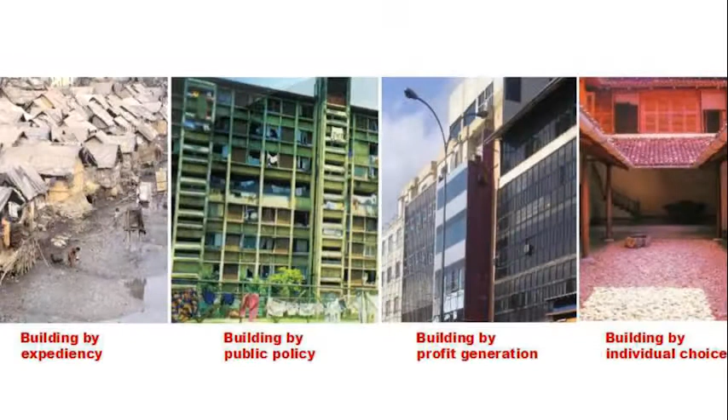There's also a kind of misallocation of intellectual effort in the industry. Professional and industrial actors have largely ignored the spatial needs of the poor and allowed proliferation of informal settlements as a social pressure-releasing mechanism. Public housing, traditionally seen as government's responsibility, has not risen up to the challenge. Market-based commercial development, on the other hand, is highly supported by government through tax cuts, zoning, and so on. Architectural production, unfortunately, is limited to a few individual buildings, often defined by patronage and top-end tourism.

So what has happened is that the construction industry is fragmented into different pockets of production with little or no reciprocal connection between labor training and knowledge dissemination. This has made it difficult for all those informal actors starting from the bottom of the ladder to move across markets, learn from others, and develop socially as well as technologically. In other words, there are seemingly technological barriers which prevent dissemination of knowledge across markets.

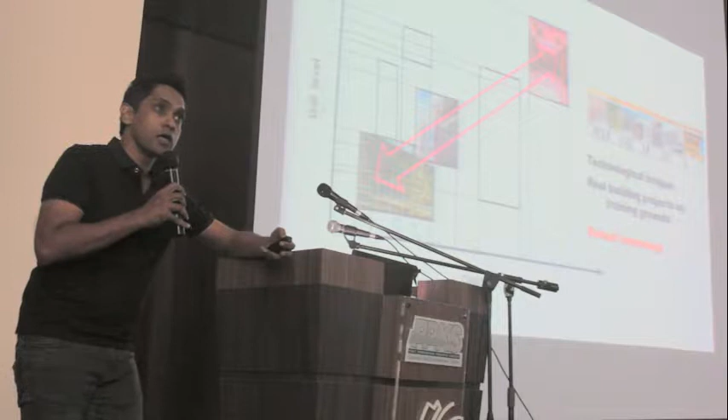So if there are technological barriers which prevent knowledge dissemination, then we will have to have technological bridges in the form of skill-building opportunities. Our work in Sri Lanka looks at whether real building projects can be used as opportunities to train workers. From an architectural and design point of view, the argument is that if you use real building projects to train workers, then the building systems we use should have plenty of tolerances and latitude for errors, and they should be inherently robust as opposed to being precise and sensitive.

So what I'm going to do is go through a few of the projects we have done in Sri Lanka, which in different ways try to look at this issue in their own capacity. The first project I'm going to present is a community library building that we built in a small town called Ambepussa, about 70 kilometers from Colombo, the capital city. It was built by a local regiment of army soldiers for the use of the soldiers as well as for the community, especially school children living in the nearby area.

One of the first things that we saw when we visited the site was that the army had been building a playground nearby, so there were plenty of residual earth, and the army has the human resource. So using rammed earth as the main building material became a serious option.

The complex has three main buildings. The first one is the lending and reference section. One in the middle, which runs up the hill, is a children's section, and one on the top is a research area. Part of the building sits on the earth using rammed earth walls, and the other part floats above rocks using a recycled steel structural frame. And for the floor deck, we have used discarded railway sleepers.

We want to be very sensitive in the way that we tackle the environment and the placing of the building. We didn't cut any trees on the site, so the building sort of meanders among the trees, and the idea is to create a series of indoor and outdoor spaces to accommodate the functions of the program.

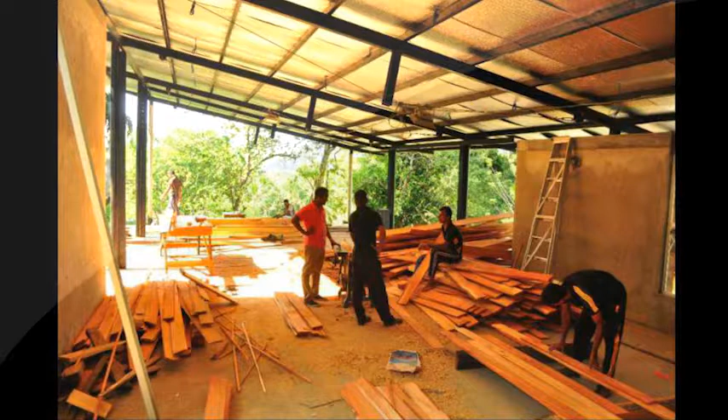But as I said, one of the critical factors was the use of labor. It was built by soldiers, and there were a few reasons why we use soldiers. One is that we didn't have a lot of money to spend on the project, so we didn't have resources to spend on skilled labor. Second is that after the war, we were left with this large workforce of soldiers who almost didn't have anything to do. So it became logical to retrain them in other trades and then use them in post-war reconstruction work.

Third thing is that, especially during the last phases of the war, the government recruited a lot of young people to the army, and they didn't even have completed their formal education. The thing with the army is that when soldiers reach a certain age, say 35, they're encouraged to leave, because the army always wants to recycle - they want to be young. So these kids who join the army without any formal education, when they were asked to retire, don't have any fallback situation. Some of them become security guards, some even fall into the underworld.

So the idea is that we use the building process to transfer trade skills so that when they retire, they can use those skills to build careers elsewhere.

But again, the thing is that we didn't have money to train the soldiers first and build the building, so the training had to be done parallel to the building process, and that had to be planned. So these are some of the studies that we did to organize the training intervention.

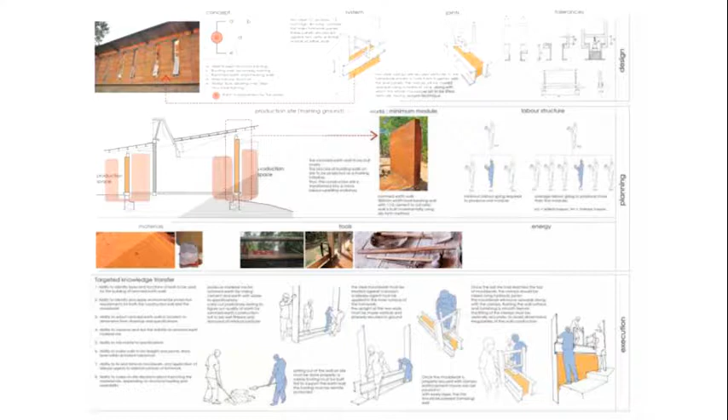So this is a building of rammed earth wall. We had to design the building system as well as the construction system, the joints and tolerances. We had to define the training ground, the production site, minimum working module required to have the training interventions, the labor structure for workshops as well as eventually to build the building, and the execution process, which eventually became the training steps. We call this diagram the labor training matrix.

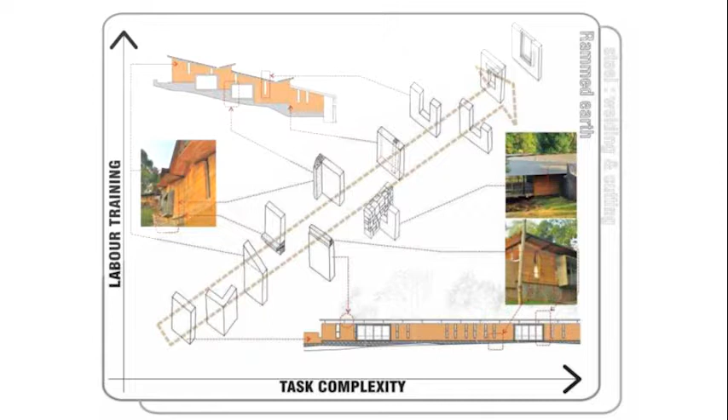So this is different building systems of rammed earth wall organized according to task complexity. You have the most simple version of a rammed earth wall, which is your typical geometrical wall. Then we are trying to connect two walls together perpendicularly. We are trying to taper the wall here so that we are experimenting with the shape of the wall. We are trying to connect rammed earth with other building systems, experimenting with threshold conditions. We are trying to penetrate the wall to create openings. So the complexity of the system increases.

The idea is that an unskilled worker can start building the most simple version and then move up the technical ladder, acquiring skills. We have strategically incorporated these building systems in the building itself so that the construction process eventually becomes a kind of skill-building ladder.

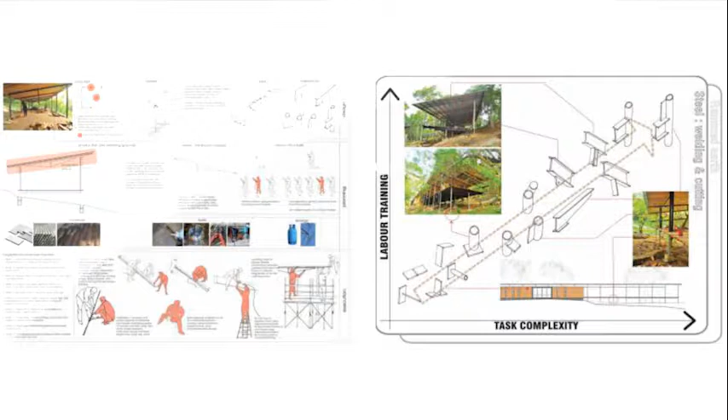And we did this with other building systems as well. So this is building a steel truss - it's about the design of the system, the planning of workshops, and the execution process. The skill building ladder again: you have a very simple version of a welding joint where we are trying to weld a rebar to a steel plate. Here you have a complex welding joint where we are trying to weld an I-section beam to a steel tube.

An unskilled worker can start building the simple version and then move up the skill building ladder, acquiring the skill itself. Eventually, the construction process became a large skill building workshop.

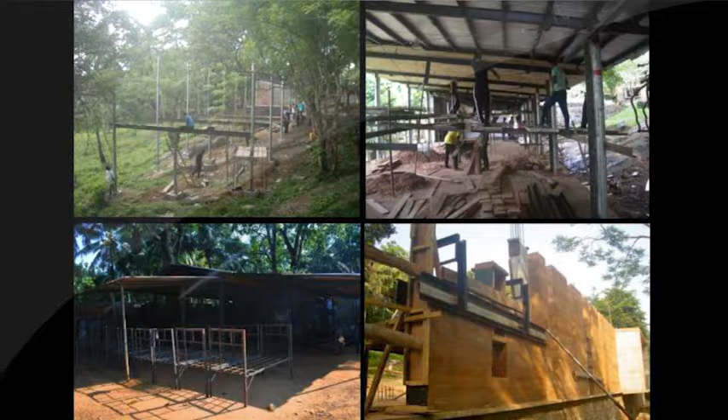We also tried to tap into the existing resources that were there. This is a kind of welding plant that the soldiers already had—they were building bed frames in steel using steel angle sections, so they had welding skill at a very basic level. The idea was to tap into that resource and develop them to a point where they could eventually build the building.

But the critical argument is that if you use real building projects to train workers, the building system should be designed with plenty of tolerances. If you look at the texture of this wall, for example, you can see different configurations. For us, it doesn't really matter.

We like to think that the ethos of the building does not rely on precision in the making, but rather it's about the scale, the texture, the way the building sits in the landscape, and so on. Even in designing building systems—like here, you have a roof truss, then a ceiling line, and a roof line—they are not aligned with each other. They overlap, because aligning is difficult when you use unskilled workers.

If they made a dimensional error in cutting the truss, that would be visible if we tried to align them. But at the same time, we like the fact that when the building moves away from its body, it starts to peel into layers. So most of these details are partly pragmatic, but partly poetic.

At the same time, we didn't want to compromise the performance of the building. When it comes to this kind of intervention, performance is all about common sense. It's common sense to design buildings with narrow floor plates in the tropics so you have plenty of cross ventilation. It's common sense to design buildings around courtyards and trees so the trees can shade the building. It's common sense to use thermal mass so the interior can be kept cooler.

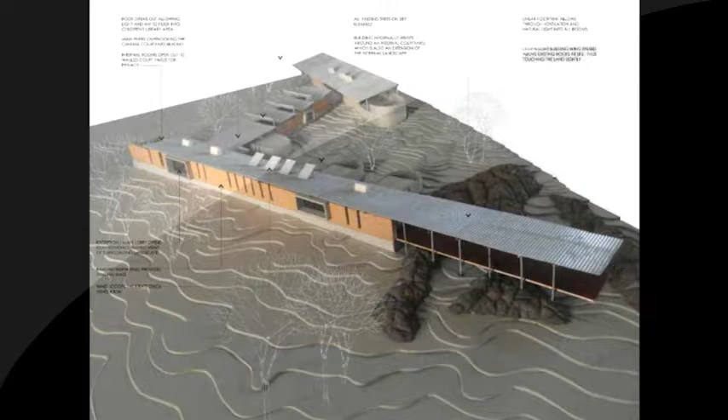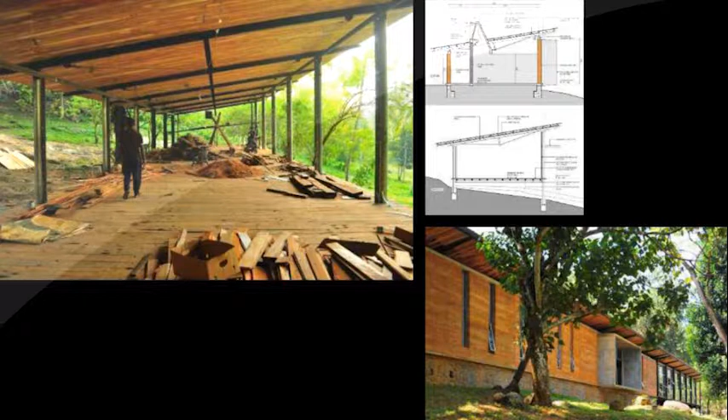It's common sense to bring in light wells and wind scoops and so on. It's common sense to raise the building so you don't interrupt natural water paths. Even in designing the building system, we were thinking of training interventions—the entire building is designed as a replication of a portal frame structure, so that once you train the soldiers to build the portal frame, they can replicate the building.

But at the same time, architecture is about color, about light, about texture, about shadows, about how the building sits in the landscape, about indoor and outdoor spaces. It's about framing of the landscape, about understanding space as a journey, about the scale, about the proportions, about the textures, about how you frame outside from inside.

But it's also about people—the people who build the building as well as the people who use it. So the idea is to create a social capital, which is the trained workforce, and a physical capital, which is the kit-of-parts building system, and use this social capital and physical capital to replicate similar libraries elsewhere.

So that's the first building. The second one is a totally different context, procured in a totally different way. It's a house that we built in one of the residential suburbs in Colombo. This is the house, and you can see it's a typical suburban landscape with different textures.

We built this for one of our friends whose father was the builder, but not a formal builder—he was in the government sector for 20 years, resigned, and then set up his construction business. The first thing he told us was that he didn't have very good carpenters or welders, but he has good masons. So using brick as the main material became a serious possibility, and we wanted to use exposed brickwork.

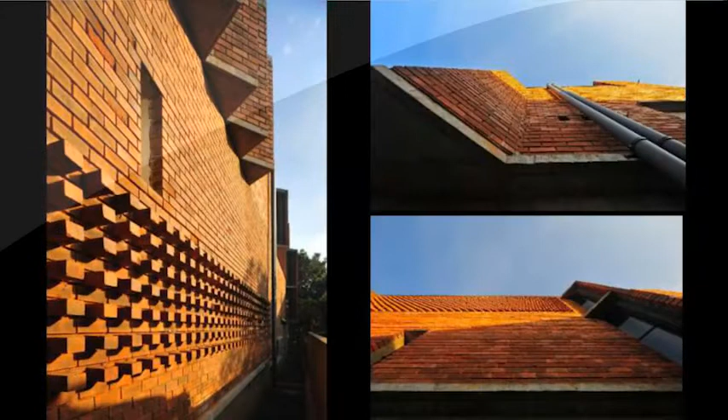But a specific character of the building is still the wall, and we have introduced a series of bricklaying techniques in the facade. Partly it's aesthetics, but there was also another reason.

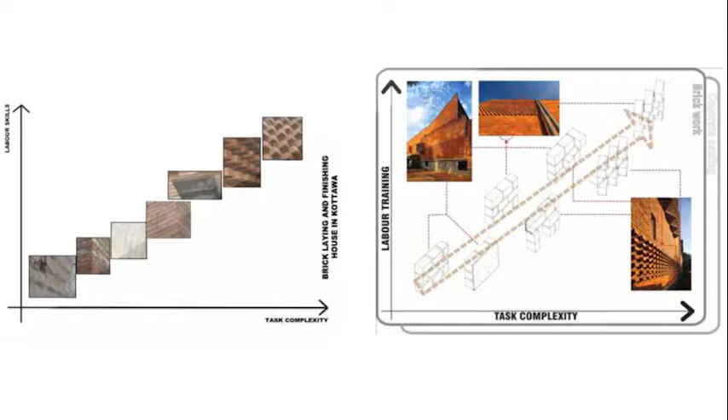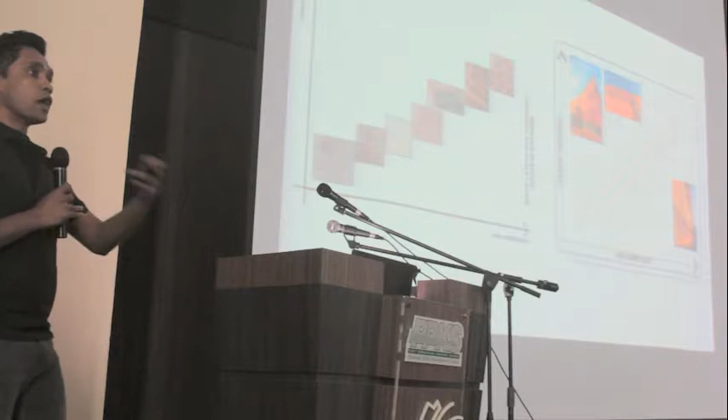We were told these masons had been in the industry for 20 years, and that was true, but this is what they had been doing—building brick walls and then plastering them. So once you ask them to do exposed brickwork, it's a totally different set of skills. We wanted to use the building of the facade as an opportunity to transfer skills to them and build up their labor capacity.

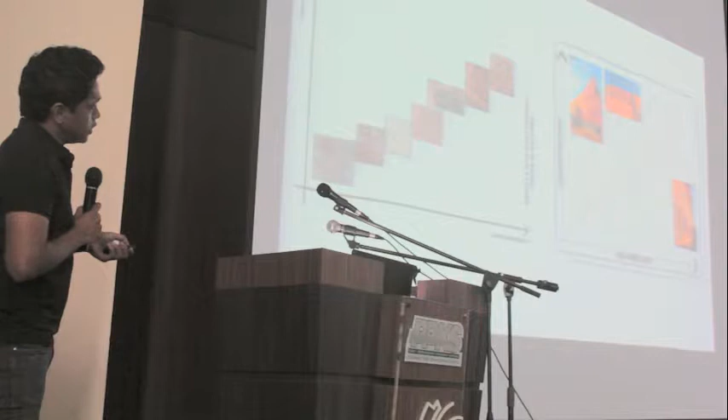So what we did was ask them to first build the walls that you would plaster, then gradually took them through the building of the facade, creating opportunities for them to upskill their techniques. This is one of the early walls they built. We asked them to first build the walls at the back and then come towards the front.

You can see here they've been struggling to align the mortar joints. There are many reasons—they weren't used to building such walls, but also in Sri Lanka, when you order a 200 millimeter brick, it never comes in exactly 200 millimeters—it could be 201, 199, or 195. When you build a brick wall from one end to another, it becomes difficult to manage the mortar joint, so they eventually learned that the tolerance needs to be in the joint, not in the brick.

But even though you see this in the image, if you go there physically you wouldn't necessarily notice these things, because there are so many other things happening in the facade, so the labor errors are camouflaged. We like to think there's a kind of built-in robustness in the facade so the labor errors are camouflaged. At the end of the day, the final product is a byproduct of responding to this series of spatial, cultural, technical, and social conditions.

Third project is a department store that we built on one of those commercial streets in Colombo. So that is the building. When I say department store, this is not a high-end department store—it's on the bottom end, catering to low and middle income groups of society. But you can see that most buildings in the neighborhood are fairly badly built and badly serviced, mostly glass box buildings which don't really work in the tropics.

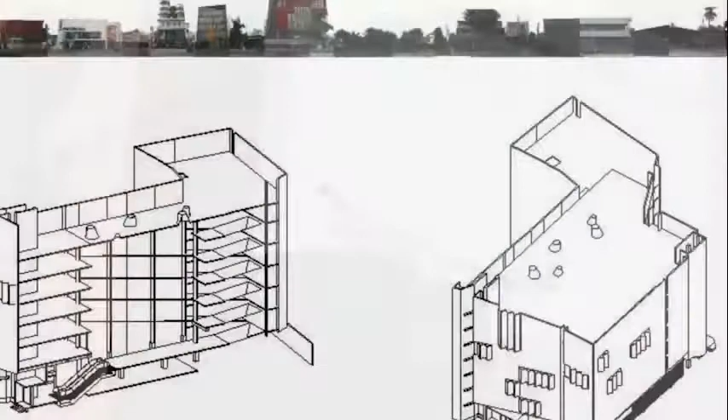So we wanted to respond to the informal, chaotic character of the streetscape, but also improve the typology. We wanted to extend the street into the building and design the building itself as a street. We created this large atrium space and introduced ramps to connect the different floor levels, so the street, physically as well as metaphorically, runs through the building.

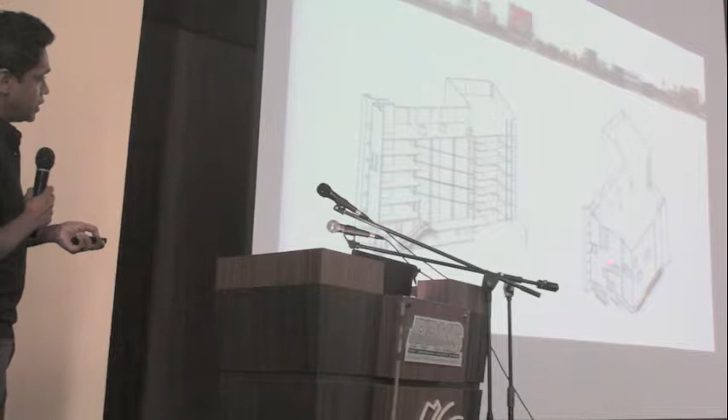We project the top part of the building from the street level so that the glazing at street level is protected. We reduced most of the glass in the facade and introduced these windows, tilting them to cut off the western sun while bringing light from the top.

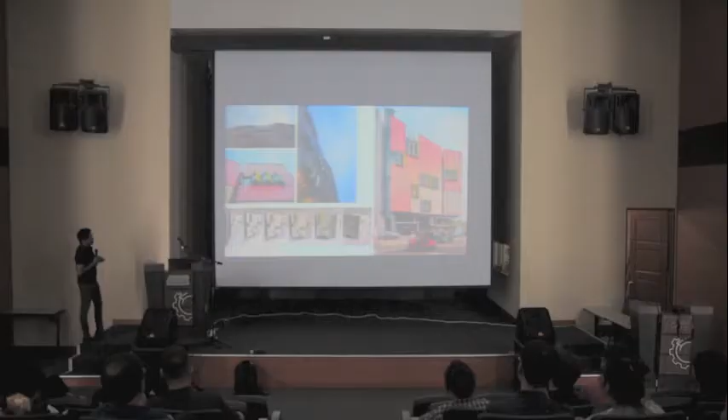The tilting of the windows also created a nice urban experience along the streetscape, because as you move from one part of the building to the other side, the facade reveals a different facet. But at the same time, there was again an impact on labor.

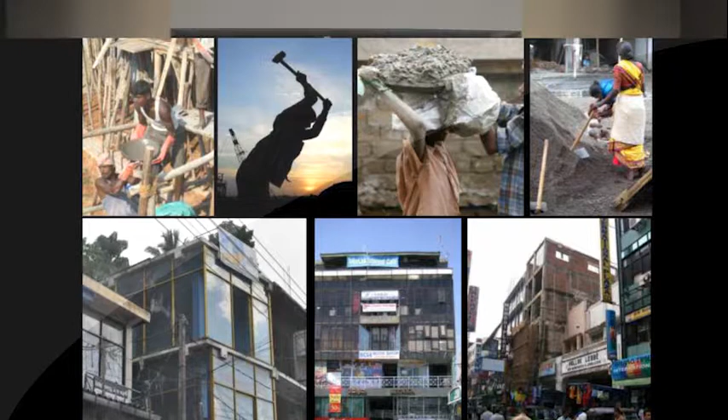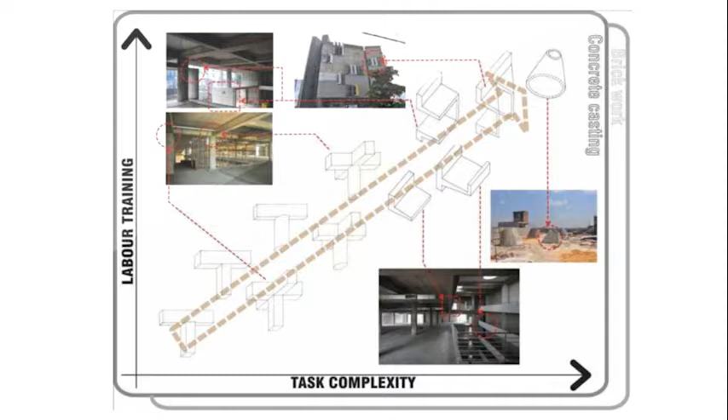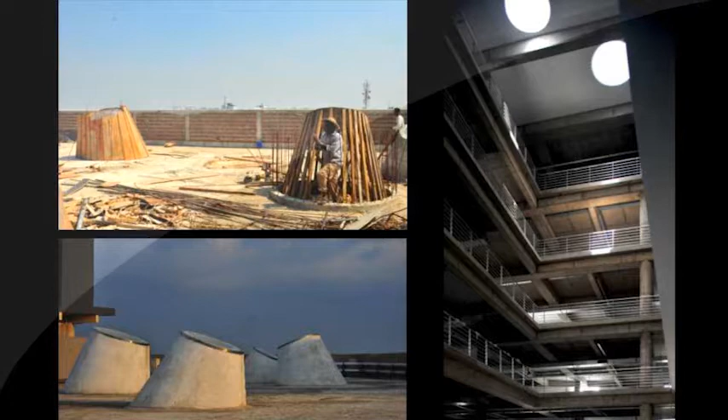So what happened was the owners of a department store chain had been relying on informal work gangs to build their other department stores, and they had an economic advantage using that workforce. They were adamant that we should seek the economic benefit of that. So we said that's fine, we'll use the economy, but at the same time, if we trigger a series of training interventions, we'll have the benefit of economy but also a better product. That triggered a series of training interventions, in this instance on concrete casting. So the fabrication of the system, its formal composition, and the eventual spatial condition of the building were all tied to subsequent training aspirations of the project.

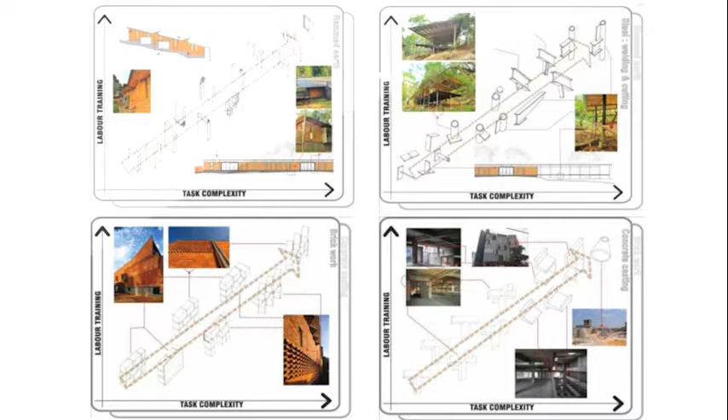This is what we've been doing, from rammed earth to steel to brick to concrete. We've been initiating different training interventions, not only to improve labor skills but also to give us an opportunity to build better products. There have been other connotations of labor in our work. I'll quickly go through some other examples.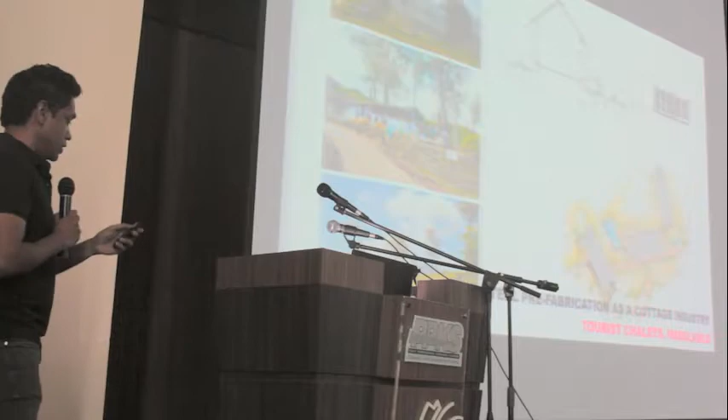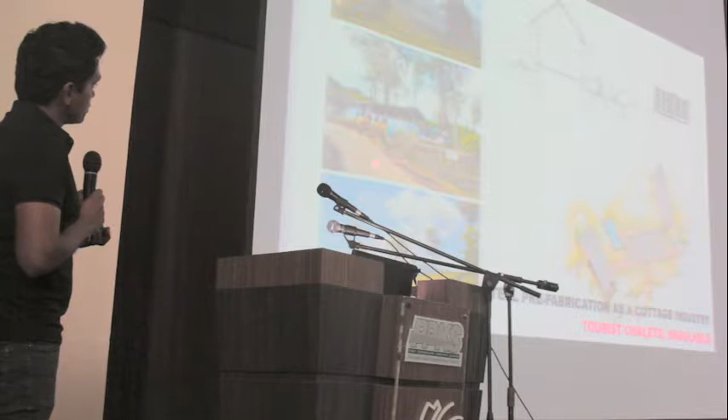This is a small chalet we were asked to build in one of the beautiful parts of the country, up in the hills. There were two issues. One is that the access road was very narrow, just a one-way road leading to the hotel, and from there you have to walk through narrow footpaths to access our site. So we had to respond to the limitations in access. Second, we wanted to design the building so that once tourism activities are terminated, we can dismantle it so the plantation can grow back.

So we wanted to design a sort of prefabricated modular building, but the problem is that in Sri Lanka we don't have an industry of prefabrication, especially in those rural parts of the country. So what we did was get a local welder, and we designed the building so that 80% of components could be built in his backyard, transported to the site, and then assembled on site. This is a deviation from standard practice, because welders in Sri Lanka are what we call journeyman welders.

They are site specific, and when they move from site to site, they take their plants and labor with them. Because of that, they can't do multiple work at once. So the idea is that if they can fabricate at least 80% of components in their backyard, then they can take on multiple jobs.

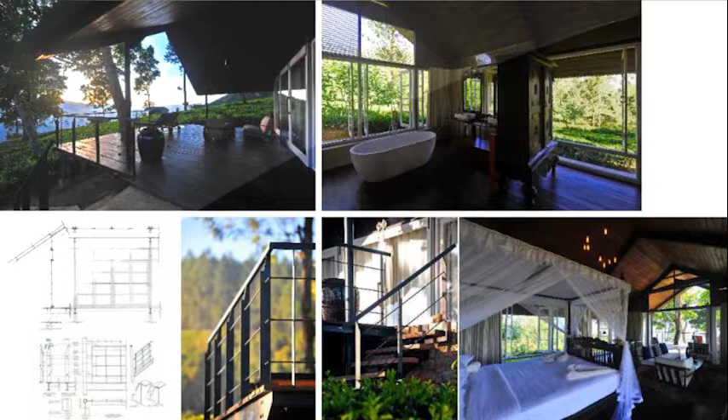Eventually they built this structure in two weeks, and the rest of the building in another six weeks. Everything is modular construction, even the windows, so you can take them apart. Other than a few retaining walls, the entire structure can be disassembled. There's a scenographic effect in the building responding to the program, since it's a touristic thing, but there's also complexity in the detail, because complexity allows us to upskill the workers. At the end of the day, it's about responding to a particular program and the demands of a particular landscape, but also seeing whether we can use that as an opportunity to reorganize the industry in a certain part of the country.

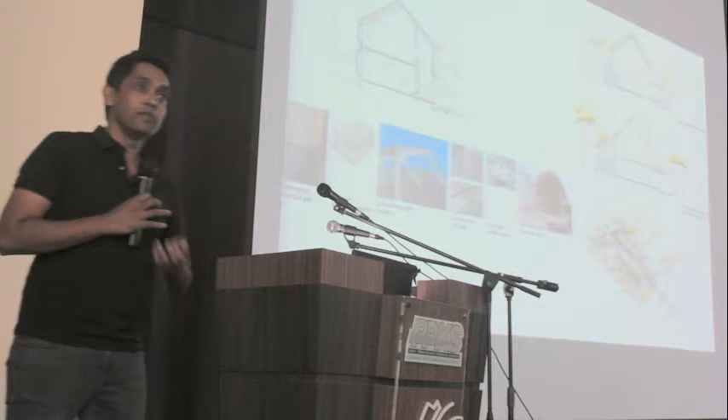This one also has an interesting story in terms of labor. It's a series of locker rooms we were asked to design for a cement factory in northern Sri Lanka. Again, it has a very brutal landscape—it's a cement factory, so it's concrete and steel. But being a cement factory, they had one material readily available: cement. So we thought of designing the building as a kit-of-parts system of cement components.

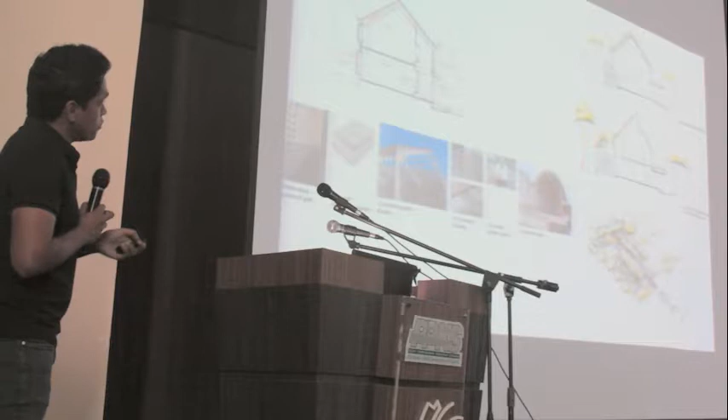So: perforated grills, sandwich panels, portal frames, walls and so on. But we also wanted to bring a certain environmental response to the building—natural ventilation, breathing walls, greening of the facade and so on. In terms of labor, the cement factory is owned by a European owner who has very strict labor standards for their workers. So we said, look, similar labor standards should be brought to construction workers as well.

Typically, 90% of construction sites in Sri Lanka don't meet such standards. So we insisted: why don't we introduce better safety standards? They agreed with that, everything was fine, but there was a problem.

The problem was that when the local contractors budgeted with the labor standards, the budget pumped up to 30% more. So it was not only the helmets, the harness, the boots, but what the contractor said was that the workers are not used to having these safety standards, they take more time to finish the building.

So we had three options. One is to go back to the client and ask for more money, which we did, and they just said, piss off, we are not going to give you any more money. Second one is to tell them, look, forget about the labor standards, we'll just do our architecture. And third one was for us to compromise, and compromise is what we did.

So we got rid of a couple of portal frame structures. We cladded the building with this very cheap steel material, which was found from the site itself. And then we did this graffiti to celebrate workers.

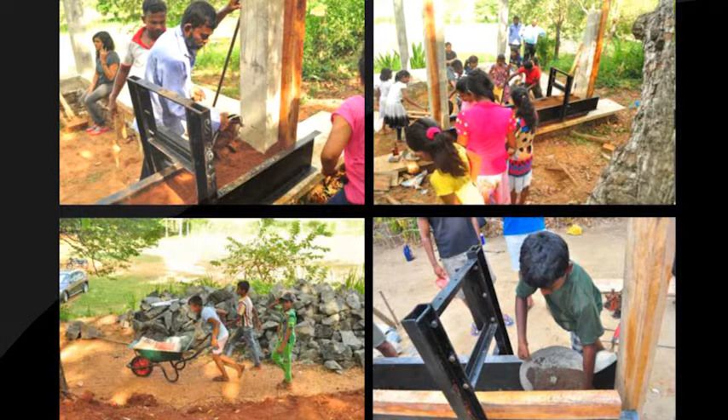So it's a collaborative process. It's a very slow process. Again, we are using rammed earth because it's economical, and kids love to work with earth. So at the end of the day, the building is as much about the process as it is about the product, and it's about creating that opportunity so that everyone can get involved. So it's we are using rammed earth and then ferrocement roof structure, and so on.

So very low cost, low skill construction system. So that would give opportunity for us to get everyone involved. So this is what we have been doing in Sri Lanka in a nutshell. This is not about continuing a style or a form, but this is about trying to understand specific context of specific projects and then try to come up with specific solutions. So every project is procured in a different way. So it's about being adaptable from the point of view of architectural approach.

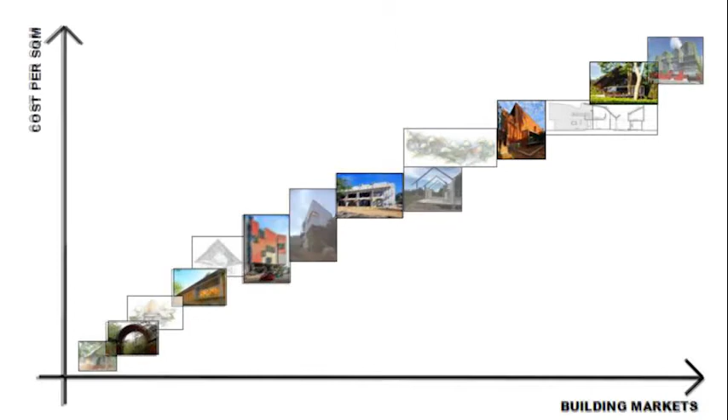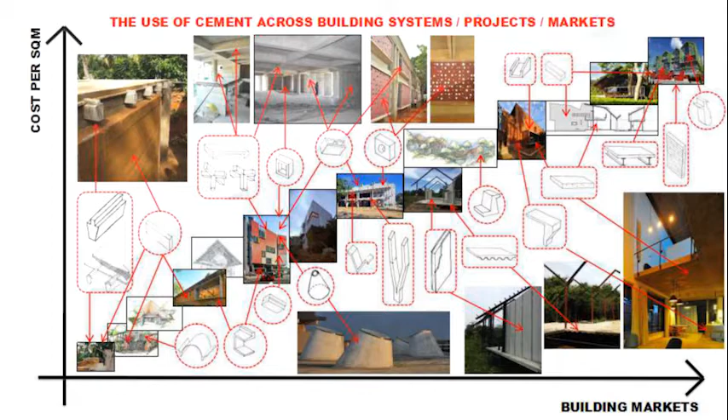And something we would like to do is to develop a practice which can travel across different markets and then respond to different spatial and technical conditions. And we believe that that can be possible by having an adaptable and flexible language of work. This is, for example, how we have used cement across different building systems in different projects and different markets. For example, at the lower end of the market, we have used sort of lightweight prefabricated components using local manufacturers, ferro-cement, rammed earth, and so on. In the middle segment of the market, we have been relying on the conventional knowledge and casted objects like ventilated blocks and sandwich panels. And towards the high end, it's more about the refinement of casting.

So this is not possible here. This is not needed there. So it's about trying to understand the opportunities and limitations that are projected in different building markets and then coming up with a solution. From a research point of view, it's also about how a singular practitioner can define the industry that they work for. So it's about coming up with design and building solutions which can adapt to different technical and cultural complexities on one hand and economical possibilities on the other hand. And that is, in summary, what we have been doing in Sri Lanka. Thank you.